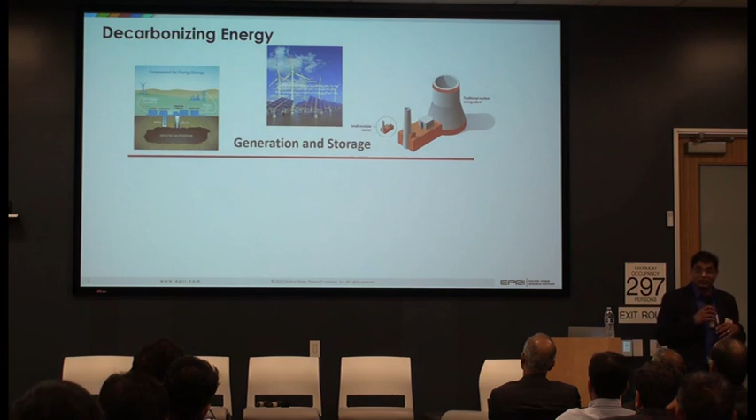So there's generation, energy generation and storage. And when we think of energy generation and storage, yes, everybody knows renewables, there's lots of renewables going on. We have seen that market transform in the last 10 years. The cost of renewables have come down, it's happening everywhere. There is some research going on things like modular nuclear reactors, it's again low carbon energy generation. And then we have to think about storage, as we think about how we are going to get to this 80%, 90% renewable goals.

Storage becomes very important, and we have Shankar Ramurthy who's working on energy harbors. Really, really interesting company, looking at storage that's not just 1 or 2 hours for your batteries for cars or things like that, but seasonal storage. The wind doesn't blow all the time, the sun doesn't shine all the time. You could have 10 days when there's no renewable generation. How are we going to balance the grid? Shankar is going to talk about that.

Then we talk about how do we get carbon out of the usage of energy. And when we think about it, yes, EVs used to be exciting and interesting, but electric transportation has to go beyond EVs. So how many of you have heard the word, and I might not say this correctly, flygskam?

Okay, so that's the new word. I think it's called the word of the year now, because it's called flight shame. Flygskam is flight shame in Swedish. It's about the fact that the carbon intensity of airplane flights is pretty soon going to be the highest intensity, highest carbon emitter, if we start doing what we're doing right now in buildings and the generation grid, that's going to be the biggest carbon emitter. And so Satya is going to talk about how we are going to address that with electric aviation.

So again, these are all pieces to the puzzle. Then we have to look at how we are going to decarbonize our homes and buildings and look at the technologies that can do that. Venkat is the CTO of Bloom Energy, the pioneers of fuel cell technology. He's going to be talking about what they're doing moving forward, not just for buildings, but at the generation level. There's all these issues around how to use gas, how do you do carbon sequestration. So Venkat is going to talk about the big picture with fuel cell technology.

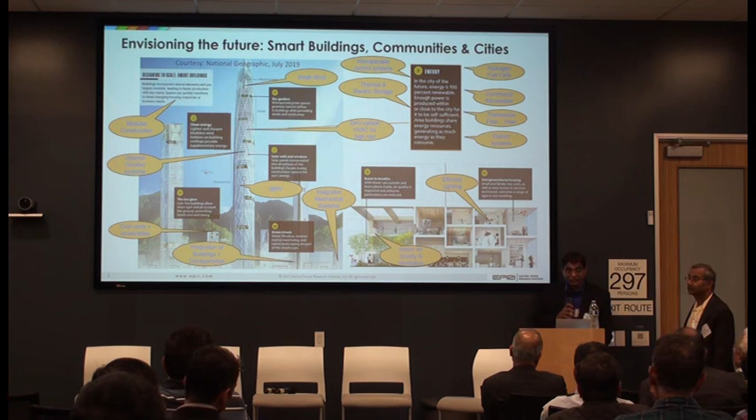Good morning or good afternoon, depending on the time. So, anyway, I'd like to give a brief introduction about Bloom first.

I think the way the company started initially was just power generation. So we never talked about how it fits into clean tech, and it kind of morphed into it over time. Now when the needs are there in terms of not necessarily producing power, you need to produce this in an eco-friendly way, it needs to be reaching everyone in an eco-friendly way. So the play field has changed over time. I've been with Bloom for—I used to be called Ion America—I've been with Bloom for 16 years. I've seen the transformation in the entire industry, where we initially thought, okay, I have to get cheap power, but now we've come quite a bit. So let's start with the vision of Bloom first.

Our mission is to make clean and reliable energy affordable for everyone in the world. That's a mission we started, and it's getting more and more relevant now than when we began. When we started, we thought producing electricity cheaply was enough. Now clean and renewable factors have to be considered. Above all, we have to save the earth, so there's a moral and ethical responsibility we have that goes beyond just producing power.

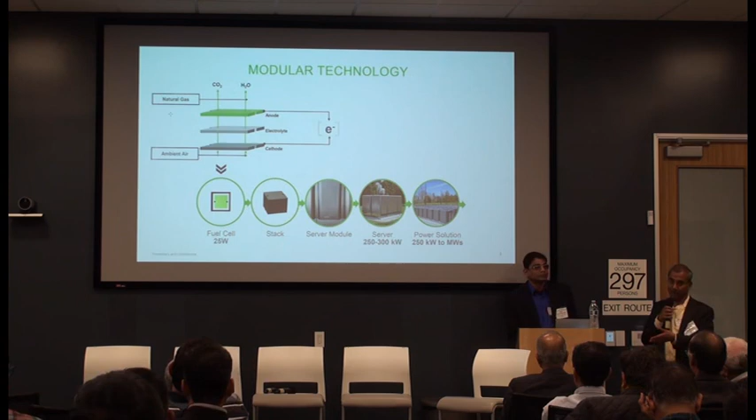In terms of construction, we actually go through steps. We get cells, we stack them, we put them in modules, and then we build the power plant at the end. So we have scalability, and every module is 50 kilowatts, and you can go from 250 kilowatts all the way up. We already have implementation of 30 megawatts, no limitation, you can go all the way up. It also gives you the ability to build as you need. It's not like one day you have to decide and do everything. You can build as you need.

If you look at the next slide, I'll give you some classic examples. We are supporting data centers, and in Korea particularly, where the real estate is limited, we actually did the car park type of structure you see on the right. That's the thing in South Korea, where you can stack it up as much as you want. So it gives you the flexibility going from small installations all the way to large power plants.

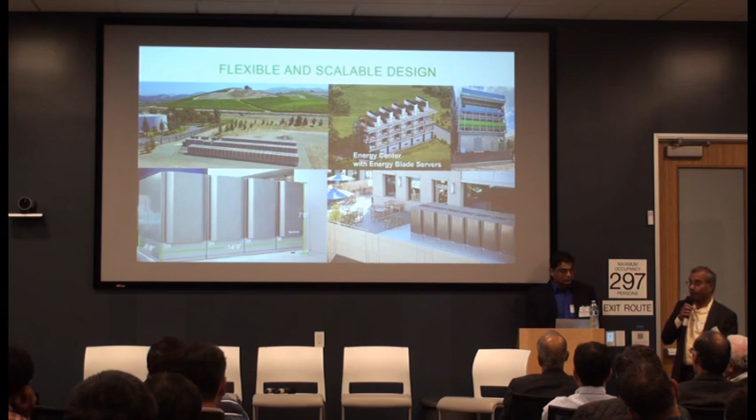So what is the main difference here is, if you think about the traditional way of doing power generation, obviously you produce power, then you have to transmit it, then you have substations, and finally it comes to you. You've got all the wires sticking out, right? There's nothing like that for us. We basically have on-site power generation. Because of the fact that we are 24/7, we have reliable power, and we've got the modularity attached to this, you can practically get away from using UPS and backup generators—all of that can be eliminated completely.

So in essence, if you're looking at reducing CO2 emissions or greenhouse gas emissions, by virtue of just removing the backup generation alone, it's pretty big for places like India.

For instance, if you look at the right-hand side, it's the actual operation curve for the Intel data center that we support. Before we implemented, they used to have outages every day, and every day they had to create backup generation. After that, we became the primary load and pretty much eliminated it. So if you look at the power produced by Bloom, it's constant, and it actually supports the load regardless of whether they exist or not. That's big, and they would still have backup generation. They originally thought they couldn't run it down, but now over the years they've realized they absolutely can eliminate it. So this is good news for India.

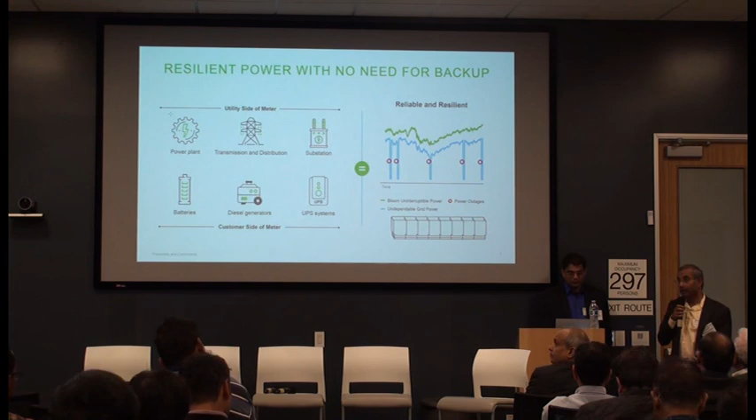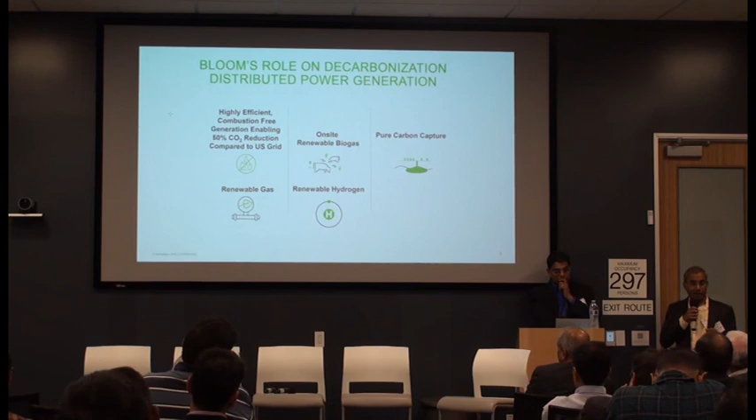So where we are heading is, if you look at the space now, more towards decarbonization—today we can take natural gas as it exists and convert that to electricity, which reduces the amount of emissions. If you take the next step towards it, then what do you do? You can actually take biogas, which we already have programs for. We've proven the technology to operate fine on biogas, landfill gas, whether it's animal or food waste—all of them can be utilized.

Just now we made an announcement: we had worked with Energy Power, who have been involved in producing biogas. We had an announcement just yesterday saying that we partnered with them to take a 4 megawatt installation in Maharashtra, using the biogas and producing power from it.

As we go further, people talk about renewable hydrogen. One of the reasons we haven't focused much on that is not because we cannot run the system, but because of the availability of renewable hydrogen. Now I think there are more technologies coming up, more efficient ways of producing hydrogen, and as they exist we can use the system, primarily because we convert from chemical energy to electrical energy at the highest efficiency, which holds good even in the hydrogen framework.

We can continue to run it wherever the hydrogen is available. It's available as a byproduct of a process, or you have a technology that gives you water dissociation to produce hydrogen. Regardless of what it is, we can use it.

The last piece we are doing is, think about the anode and cathode I showed. Because there is no fuel-air mixing, we have the ability to produce CO2 which is clean. There's no mix at all.

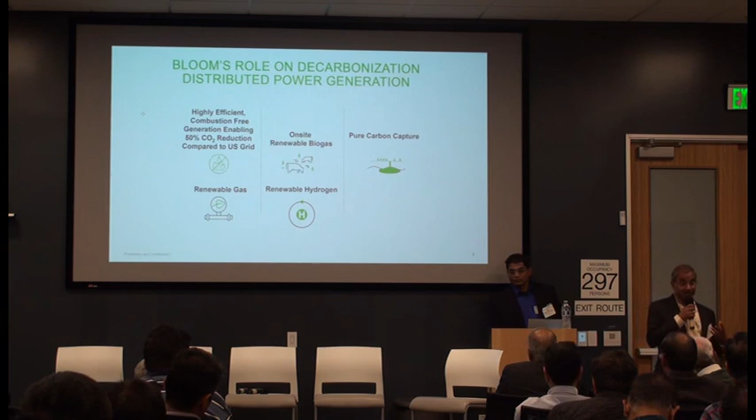For us, it's actually a given, because we do produce CO2 which is clean, with no mix with air. So now we can suck it up and give it to any downstream process.

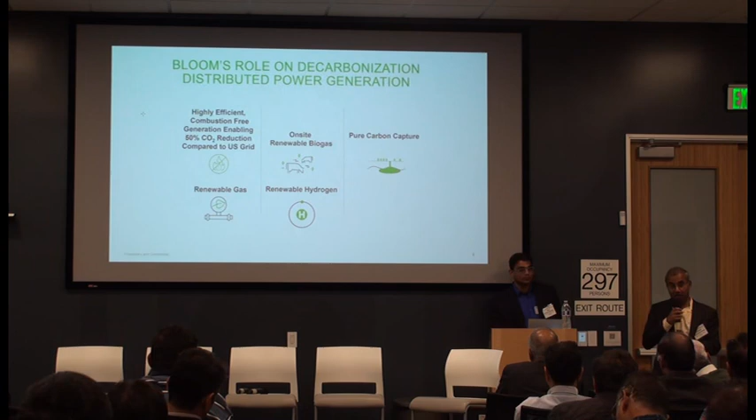Again, this has not been delivered as a product in the past, primarily because of the technology for capturing the CO2, there's a captured part and a sequestration part. There's been a lot of debate on how you do it. Now, slowly in the US, they have studied different ways of doing it. Even storing the CO2 underground, they've done a large geological study to figure out where you would be sequestering. So that is going in full speed.

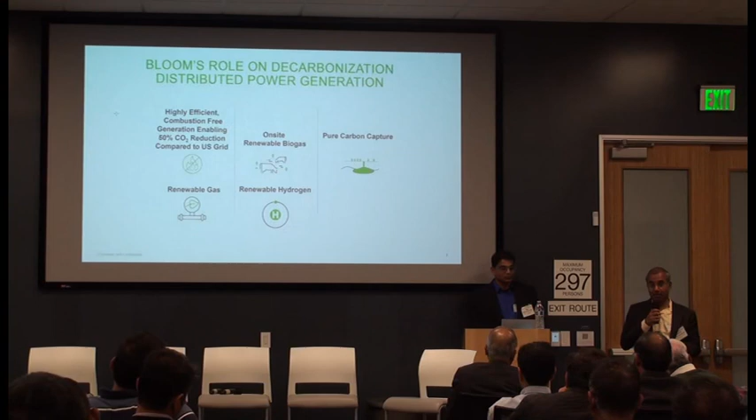So now if you fit right into that, you take the CO2. The last 3 days I've been working with Southern, a utility on the East Coast. They are interested in taking the CO2 and putting it in the ground. I actually visited the site where they do it. So we're pretty simple about it.

Now that we're doing this end to end, think about it this way: you've got your natural gas with high efficiency, reducing greenhouse gas emissions compared to conventional. The next level is you can use biogas and become carbon neutral. Now extend it further, you have a way of taking the CO2 out and putting it in the ground. You actually create a negative emission. That's the way we are approaching the decarbonization problem.

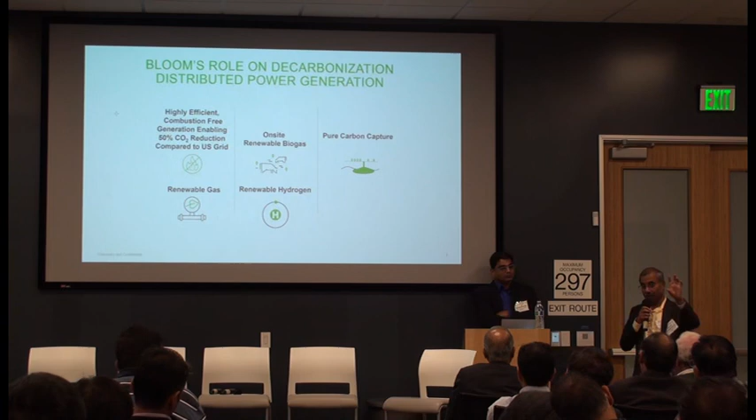The other part is, since we are set up in a way that doesn't generally require a separate power generation setup, we can integrate with any technology. For instance, we have applications where we integrated solar. Take the Apple Campus 2 case study - we actually coexist fuel cell as the primary source along with solar.

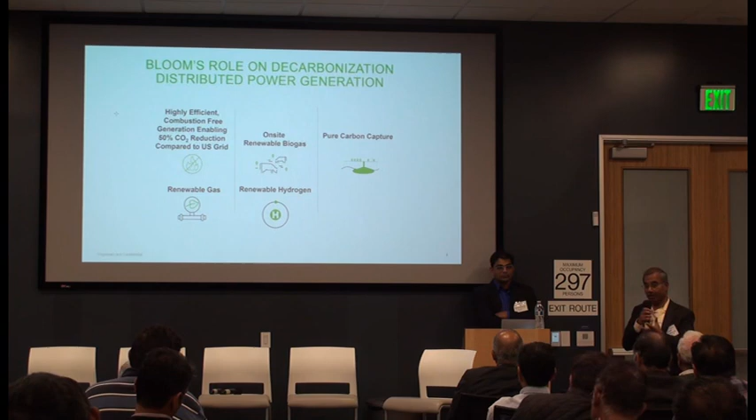We can take any storage technology - we have applications where we're doing storage as well. In other words, you can create a microgrid environment where we become the primary source. The biggest challenge in a microgrid as it exists is you need steady power, otherwise your supply and demand won't match, so we are right there.

So, what's our overall strategy? First and foremost, distributed power generation - that alone avoids all the transmission losses. We've got the paradigm shift from natural gas to biogas to hydrogen. We can fit into this framework.

Furthermore, people ask, hey, you're at 65% efficiency, what do you do with the rest? The rest of the heat. We never bothered about it because heat integration is a pretty tough thing to do. Now, the fact of the matter is, when you go to the tower - the thing you saw in South Korea - they all come into a common plenum, and we can recover that piece of heat too. So we've done work making it a combined power generation with heat recovery as well.

We can produce pure CO2, greater than 99.5% purity. We have the ability to go into negative emissions. And furthermore, there is an interesting paradigm shift.

People have been working on lithium-ion batteries and battery technology for storage. But if you look at an article written by a professor at Irvine, Jack Brouwer, he says think of it this way: if you have excess energy in some cases, you have two options - store it in lithium-ion batteries, or use it to produce hydrogen and transport it, which becomes a way of shifting energy from one place to another. And we are right there. He claims the round-trip efficiency is pretty high.

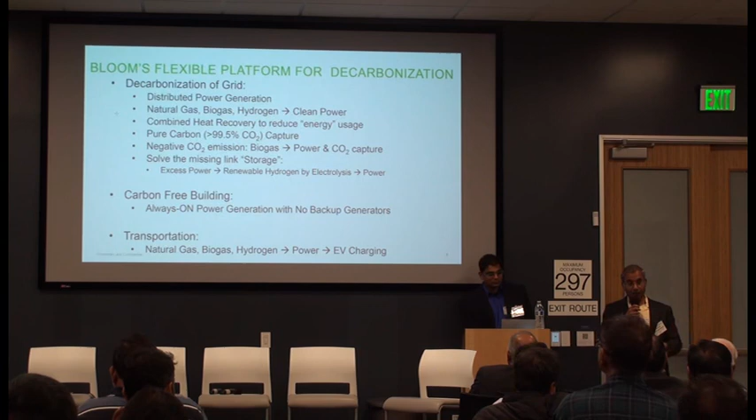So we already kicked off a program. We're going to be working with a company that manages a digester. They are taking animal waste in the Fresno and Bakersfield area, and they will be tying with us. We'll use their biogas to produce electricity, which will be used for vehicle charging. So we've thought through the whole thing about decarbonization in a big way.

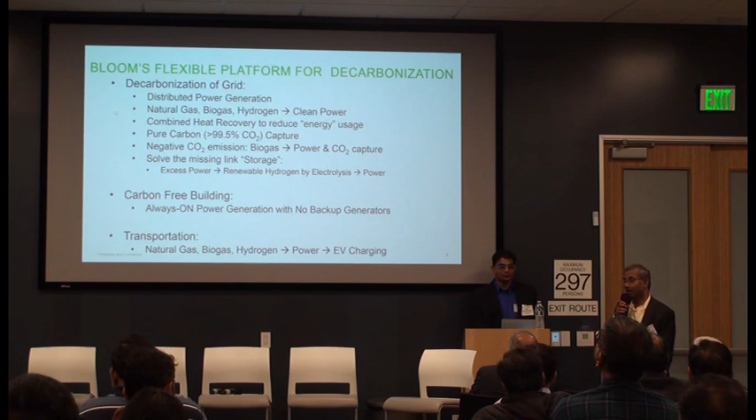I think we are right in the center of it. We have all the tools to be manipulated depending on the demand. So if you go to the last few slides, I just want to give a few use cases.

This is the one in Utah - an eBay data center. Originally they wanted to design a tier 4 data center with UPS and all the generators. They had a plan to do that. Then they actually did an independent study - they hired a third party to review our technology and found out we are actually better than the tier 4 data center in terms of reliability. So finally they decided to go with Bloom.

So we became the primary power and the grid is the backup. The good news is there are instances where the entire state of Utah lost power - we were the only one powering the data center. There you have to look at the value proposition: every millisecond translates into millions and billions of dollars. So we've been operating for the last 5 years.

It's old technology. The other one is Apple, you all know. If you have time, you can go and visit them. We became the primary source. This is the one I was saying.

It's like a microgrid - we coexist with battery storage, and also with solar. The controller, the way it works out, is we can actually flex it. This is very important in a microgrid. People have been talking about microgrid, but if you don't have a stable, round-the-clock base load generator, it becomes extremely complex, because when you produce power, delivering it becomes difficult.

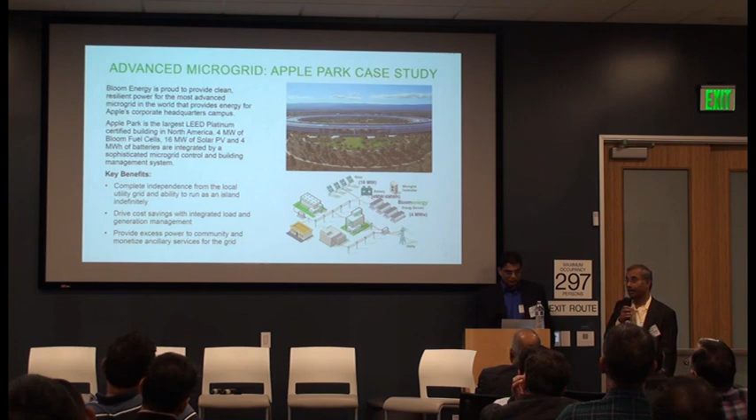And then the last bit is Intel. The story I told you is they also had demand issues. They had two problems: one, they had to run the generators every day, and they had power outages. Second, for them to expand, they had to go to BESCOM and build a substation.

So they came to us. We became the primary source - it's been running since 2016. We became the primary power. We parallel not only with the grid, but also with the generators in this case. So when the grid is off, we can parallel the generator too.

Initially, they were a little worried about Bloom, so they actually kept running the generators alongside. Over time, they got the confidence, and they practically brought down the load taken out of the generator. This is actually running at one-tenth of the load it can support, so now they're planning on removing the generator entirely. So this is another case study.

So to conclude, I think from Bloom's perspective, we've gone through the entire ecosystem where we fit in. I think we are in a pretty good place, particularly as we believe in the different technologies we're going to be talking about today. We have a way of integrating with all of them to create the microgrid solution. The thing I didn't talk about is that on the right-hand side, from a fuel perspective, we have flexibility starting with natural gas, going to biogas, and also using hydrogen - we can also capture the CO2 coming out.

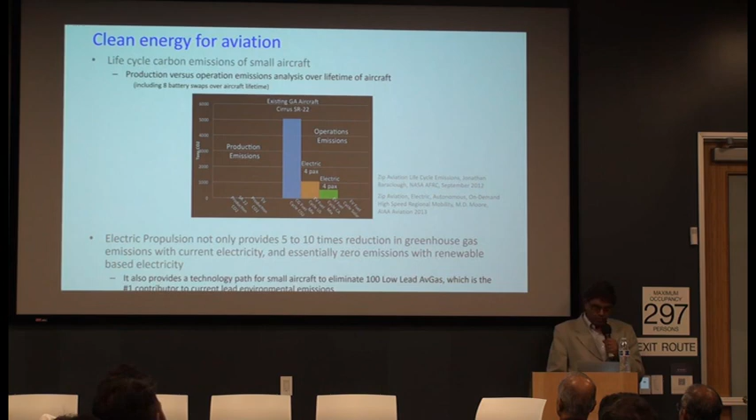So what is exactly the problem? The problem essentially is the energy penalty. This energy penalty is a much more severe penalty in aviation when compared to automobiles.

Here's this graph comparing the Cirrus SR-22, a four-seater aircraft, and its corresponding electric aviation counterpart. The point is, if I have to have the same range for the aircraft, I need to put in so much battery, because the battery doesn't really have the kind of energy densities needed today. If I'm looking at a battery density of about 200 watt-hours per kilogram, you're looking at an aircraft weight of about 11,300 pounds, which may not even be possible for the aircraft to take off in order to give the reach that it wants.

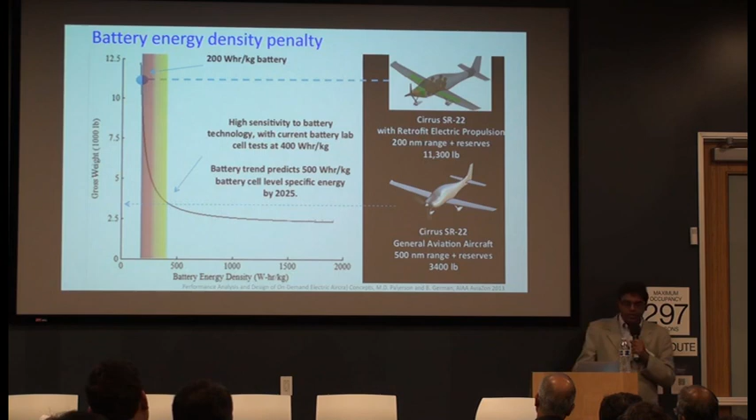There's been general skepticism about this in the last several years, where people say there's this huge hyperbolic curve, and you need to get to a floor of at least about 400 watt-hours per kg, and that's not happening yet - but we expect it can happen by 2025. I have a completely different take about this, and that will unravel pretty soon. But the point people have been saying is we're waiting for this messiah of a big energy density jump.

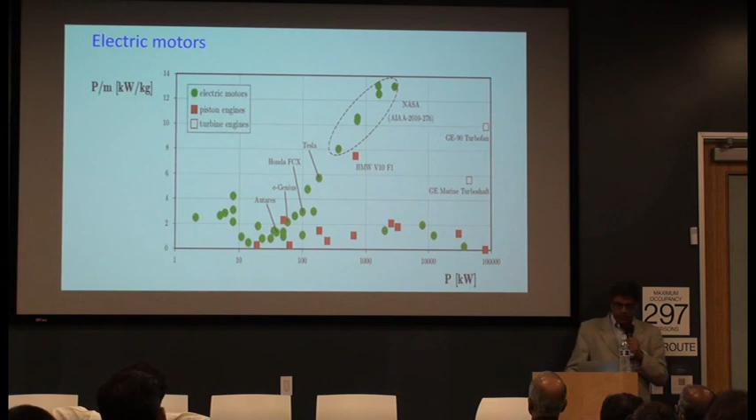Now, it's not about the batteries alone. This gives you an overview of all the different components - we need to worry about the motors, and NASA has done a marvelous job in the mid-range of power, at about the 1,000 kilowatt level, developing motors with a very high power-to-mass ratio. The first thing we have to worry about in aviation is having very good energy density for the batteries, upwards of 400 watt-hours per kg as we talked about. But we also have to have these motors be pretty light. So lightweighting is very important, and there are significant developments focused on electric motors from a lightweighting perspective for this purpose.

Closer to home, where I belong in aerospace, there's some kind of aerotech also being developed by NASA, which is called distributed electric propulsion.

So we take advantage of the fact that electric propulsion is scale-free, which means we can distribute a lot of small propellers along the wing with small motors. You don't have to have mechanical transmission from a big engine in the middle to the different propellers; instead we can simply run wires, which is a lot easier.

What this basically does is change the aerodynamics of the flow past the wing and enhance the lift produced. Now, if you have enhanced lift, why do you need it? Because the weight of the aircraft stays the same, so you only want the lift you need, which allows us to shrink the wing size.

You don't necessarily shrink the wingspan, but you shrink what's called the wing chord, the width of the wing, which allows for less drag. And with lesser drag, improving lift and decreasing drag, or the L over D ratio, can actually extend the range further from an aerodynamic point of view.

Since the wing becomes sleeker, we can have much better ride quality and gust sensitivity, because we don't have large wing surfaces that a gust could shake. This matters because in urban air mobility we're looking at aircraft flying at much lower altitudes than conventional general aviation, where gust becomes important. General aviation aircraft typically fly near the tropopause, past the clouds, where there isn't much gust. But with urban air mobility, where you'll be picked up from your home, you're looking at an altitude that is gust prone, and this becomes very important.

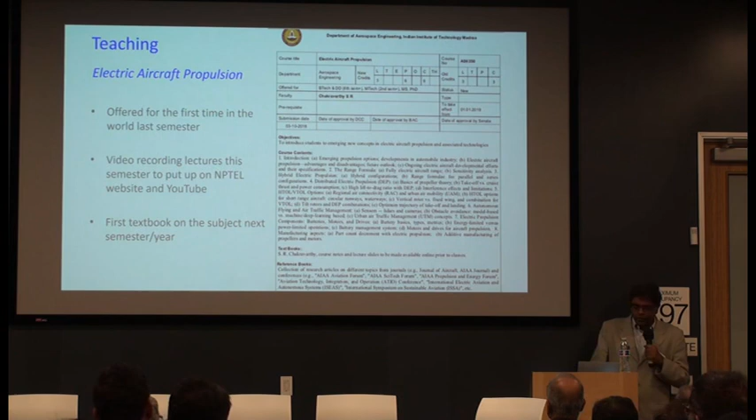A full semester course on electric aircraft propulsion. I did this last semester and I'm continuing it a second time, making a video recording of it and putting together a textbook on this, so that I plant a flag for myself in this space. That's exactly what we're supposed to do.

Last year and this year I've been presenting papers at the AIAA Aviation Forum on similar topics, like a range equation for series hybrid aircraft where some combustion support is also provided, and another on deep learning for autonomous traffic control systems.

These are a couple of things we've done. Very recently, I've begun looking at metal-air batteries, which Professor Getu's videos covered with someone from Ashok Leyland. I'm part of a small team exploring whether we can use metal-air batteries the way air-breathing engines have been used - if I go faster, can I improve the performance of these batteries in air?

On technology development and entrepreneurship, we have an IIT Madras incubated company called the E-Plane Company, which right now is doing something very small - a tabletop VTOL and fixed wing hybrid, similar to Lilium, meant for cargo transport, typically food deliveries and medicine deliveries.

But we have plans to scale it up into something bigger that can carry tens of kilograms of payload over long distances. It looks like a VTOL, can take off and land anywhere, hover and avoid obstacles midway using deep learning and computer vision, and fly over long distances, about 100 to 200 kilometers on a single charge carrying payload.

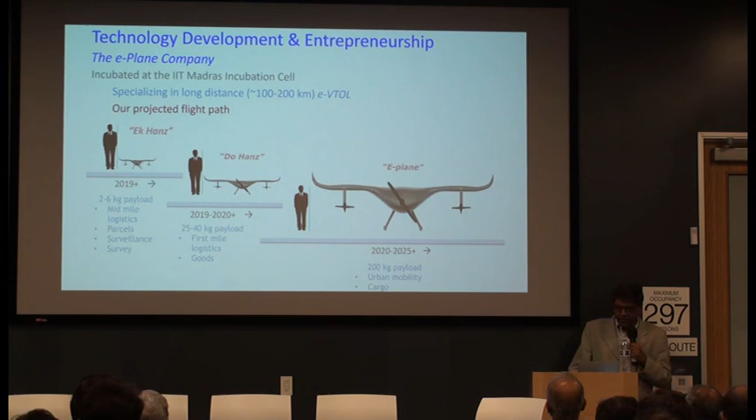The long-term vision over the next 5 years is to step it up to about a 200 kg payload class, by which time we think we can have 2 passengers go on an autonomous flight.

In the core technology, on the left-hand side we have computer vision and artificial intelligence. On the right-hand side, we're trying to marry the VTOL and fixed wing in a particular way that complements NASA's tech in the vertical sense for changing the airflow field around the airfoil to produce lift, so we can marry the two concepts together much better. We have some IP generated out of that.

We are an energy technology company, and we enable renewable energy use more widely. I use the term energy technology company because it's our energy technology that enables us to achieve a real renewable revolution. In order for us to be a pure renewable economy, we need very large scale storage. What's the problem?

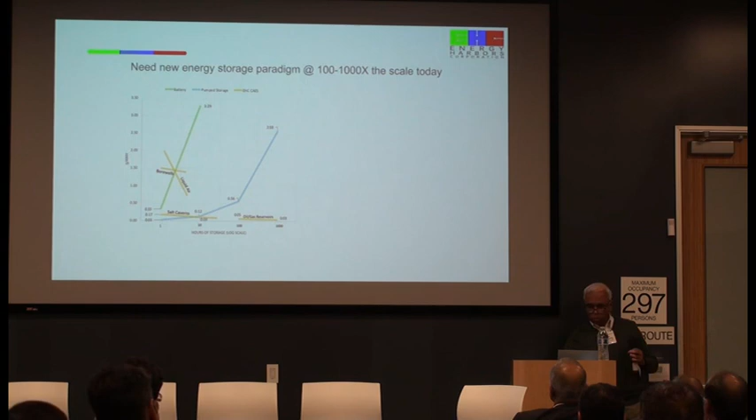Is that good? I can scroll it for you. Thank you. So why do we need very large scale energy storage? Sorry, it's supposed to scroll one at a time. But what do we have available today?

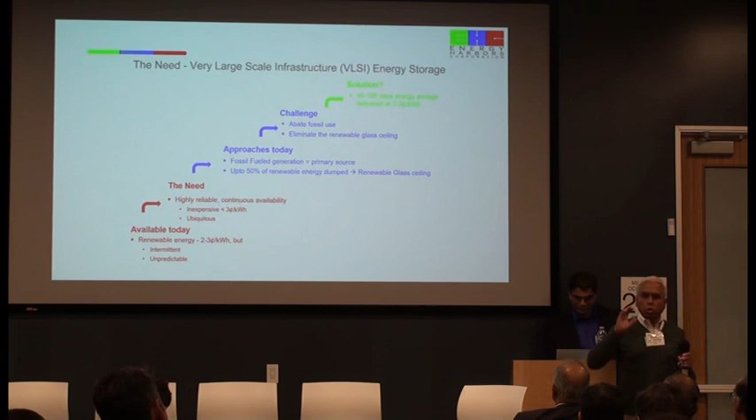So the only way we are able to achieve anywhere near this today is by having a base fossil fuel power grid. And if you try to push up your renewable power generation, without large scale storage, you're going to end up dumping most of the power, as is already beginning to happen. So you hit a renewable ceiling, beyond which you cannot push your renewable power generation, and the only way you can use renewable is by depending upon fossil fuels to take care of the base power load and basic power distribution.

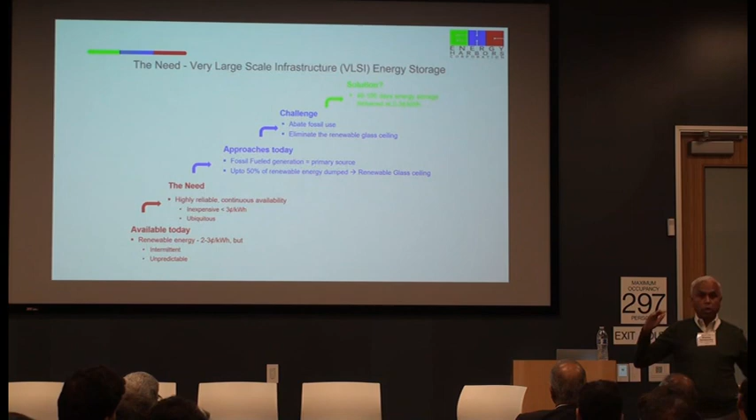So the challenge is, how do we escape and get into this pure, low cost, highly available renewable energy, and abate fossil fuel use and eliminate the ceiling? The solution has to be very large scale energy storage.

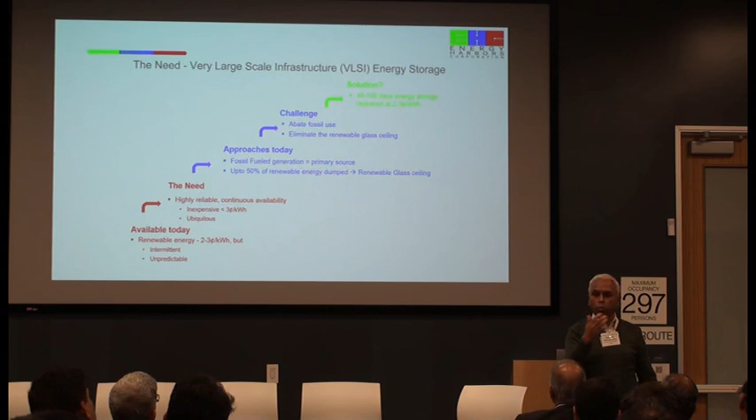By which I mean not the 2 hour, 4 hour, 6 hour, 100 hour storage, not the megawatt scale, 10 megawatt scale - I mean terawatt hour scale, tens of terawatt hours. Gigawatt power generation, and we are fuel agnostic - whether it is renewable electric or renewable gas.

Gigawatt scale, and the solution - I'll read what it is. It is 40 to 100 days of storage at a cost basis of 3 cents per kilowatt hour delivered. That's what we need, and that's what I'm defining as very large scale.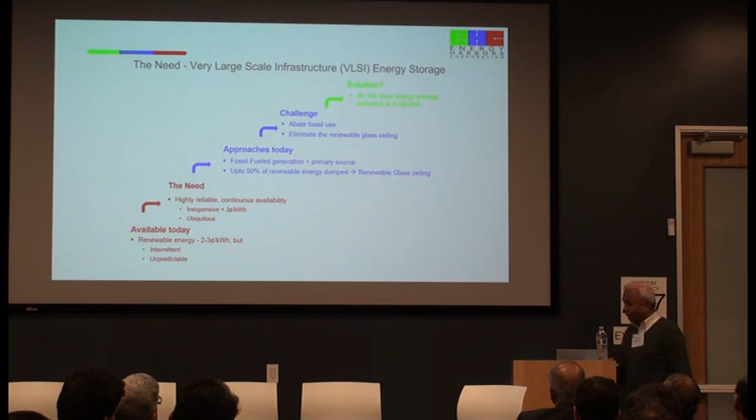I did a play on VLSI - I think it is very large scale infrastructure. It is also very large scale integration, because the way we can make this happen is with a technology that can assemble a large number of components and devices and manage them in real time. So it is in fact a VLSI technology with mechanical components.

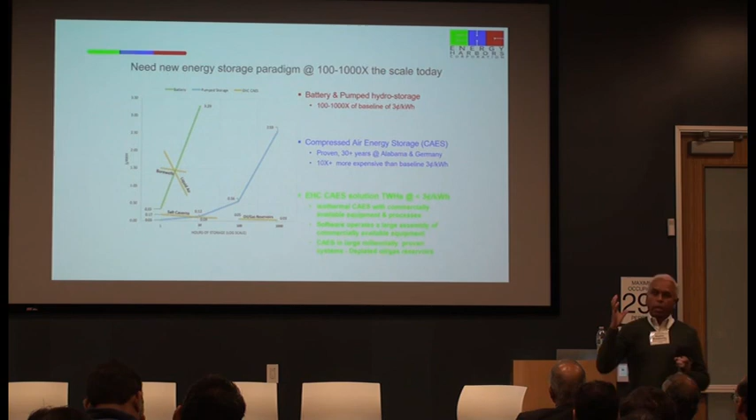And then there's another alternative - we are talking about compressed air energy storage. So it's basically taking what we have as a practically infinite resource, and compressing it at very high pressure, 100 to 400 or 500 atmosphere pressure, converting this surplus electrical energy into mechanical energy. We store this as isothermal compressed air - it's almost like using a mechanical spring. I'm taking surplus energy, taking a spring, compressing it 200 times, and when I need it, I just release it.

So it's like an isothermal compressed spring. Here the spring is air. I'm compressing it 200, 300, whatever times.

I'm reading out the green stuff here again. I'm sorry, I didn't realize that. We will lose the visibility here on green.

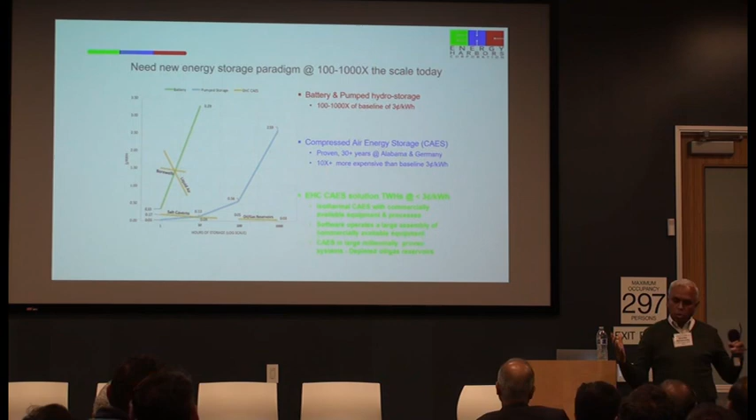So what we are really doing here is to compress air in very large reservoirs, and when you have surplus energy, store it in these defunct, depleted oil and gas reservoirs. They are large, as you know. The minimum size of an oil and gas reservoir, there are many oil and gas specialists here so you will know, it's about 40 million meter cube.

So at 200 bar, you are storing about 25 kilowatt hour per meter cube. Quick math, 40 million meter cube is 1,000 gigawatt hour, which is 1 gigawatt for 1,000 hours.

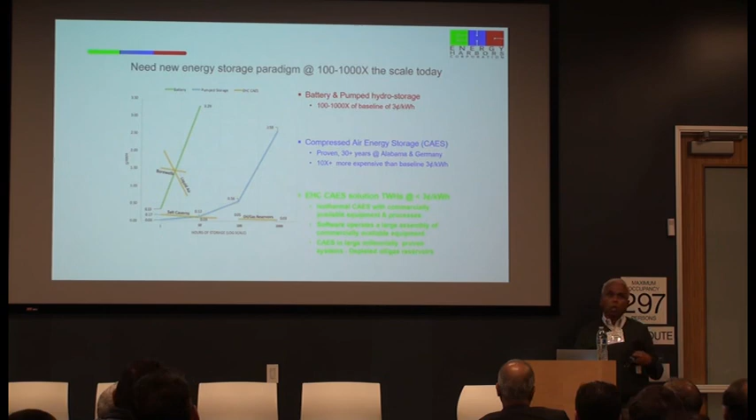So that's the large scale energy storage problem. Now the question is, how do we do it?

Many of you may have heard of compressed air energy storage, more in the context of many failed compressed air energy storage initiatives. There have been operating compressed air storage companies at scale. These are adiabatic compressed air energy storage systems that have been operating in Alabama, in Germany, for more than 30, 40 years, functioning perfectly. In fact, even now, I could mention Southern Company operating one of them. But they have never gone beyond the research stage because that technology was prohibitively expensive.

And it was definitely not scalable. They operated 300 megawatt plants for about 10 hours, but its cost is at least 10 times, if not 20 times higher than our base cost of what we need, 3 cents per kilowatt hour.

So the basic approach to doing isothermal compression is by using proven processes. Three technology companies that tried to do compressed air energy storage in the last 10 years ended up developing new processes and new equipment to solve the cost problem. And the number of cycles they took to develop the new process and stabilize it, or the cost it took to reach with new equipment, was still nowhere near what they needed to be, and they ran out of venture capital money before they could perfect the cycles.

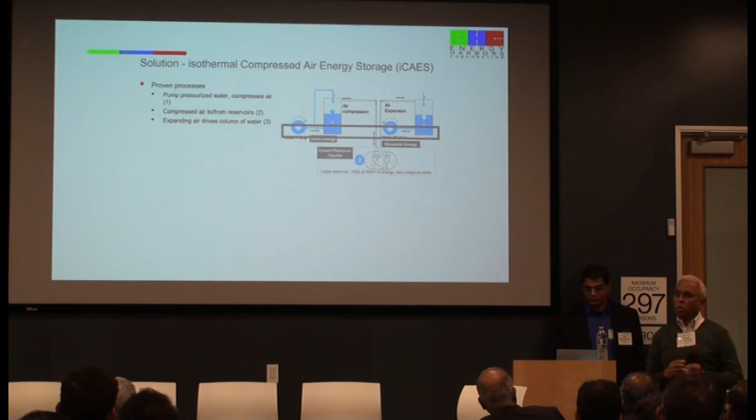And then you see that when we are trying to generate energy, we're taking the compressed air, driving the same water piston in the pressure vessel down, and that water piston is basically running the turbines. So this will be pumps acting as turbines. Okay, so that's the basic idea.

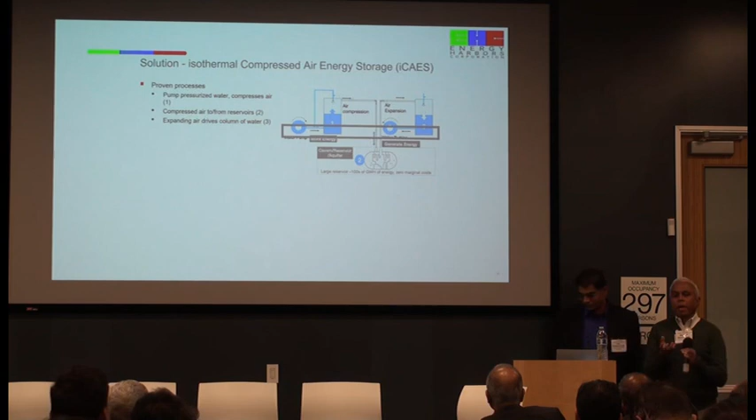We obviously have batteries in the front to take care of transients, so that we can deliver continuous, intelligently predicted, constant availability power. It is the use of off-the-shelf components, use of a large-scale assembly of these systems that helps us bring the capital cost down by a factor of 5 or more. That makes it possible for us to achieve the 2 to 3 cents per kilowatt hour.

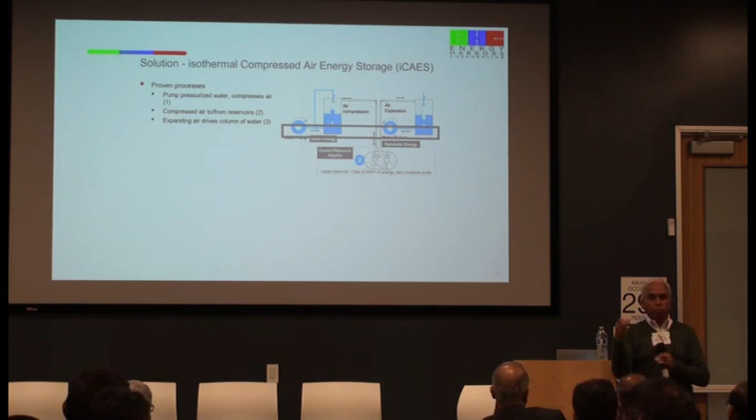This is also very modular, so you can basically install modules for 64 megawatt, which is our standard module size, itself composed of sub-modules. And the 64 megawatt is based upon the airflow that you can tolerate without significant loss with an existing oil and gas well pipeline that goes into a reservoir.

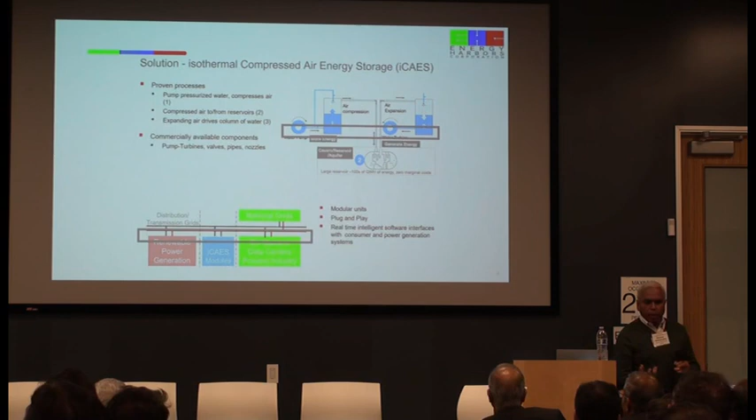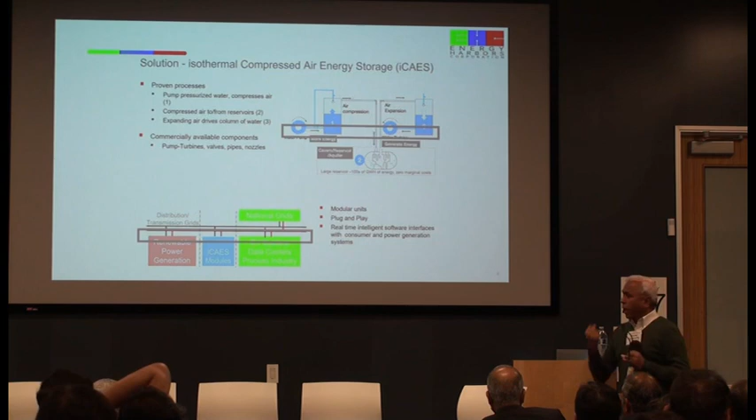This is modular again, so it's architecture agnostic, meaning it can tolerate distributed or centralized forms of renewable storage, or any other form of storage. You would have as many iCAES modules as oil wells you can install at that location. On the other side, in green, you could have microgrids, local grids at 11 to 110 kilovolts, distribution grids, or transmission grids, or a number of them. So it's grid agnostic, fuel agnostic, and architecture agnostic. These are modules that we can insert.

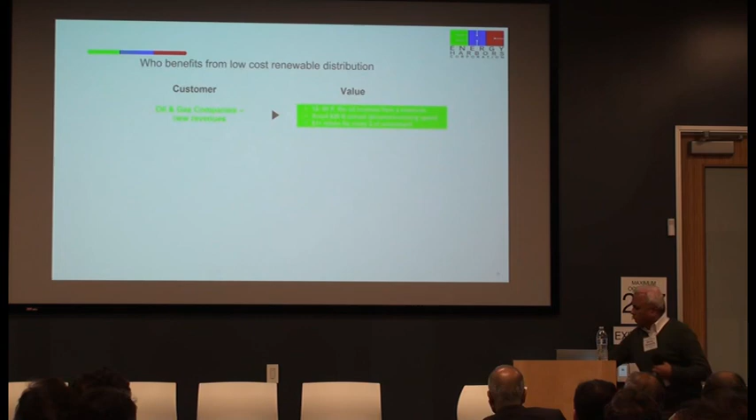Who benefits from this? These are our early adopters—the oil and gas companies themselves are our first customers. We are just beginning to work with some of them. We have a prototype in our lab, we've got an engineering design done, and we're getting ready for pilot-level demonstration plants.

The value proposition for an oil and gas company is that for every $1 they generate from crude oil per reservoir, they can have 50 times the revenue. This is the first mover advantage for oil companies who adopt this. Ironically, they would use their oil assets to transform into a clean energy company.

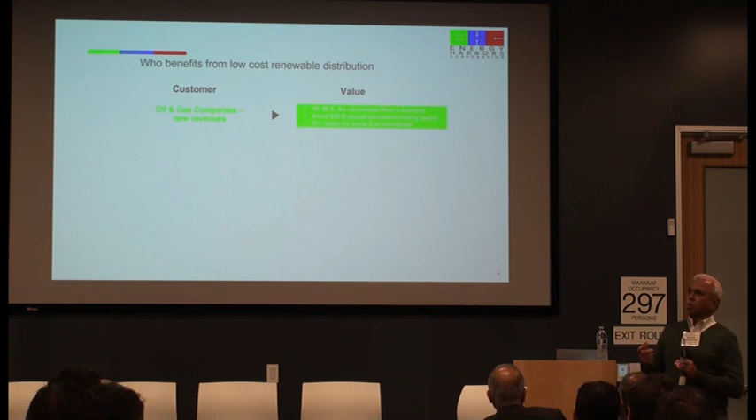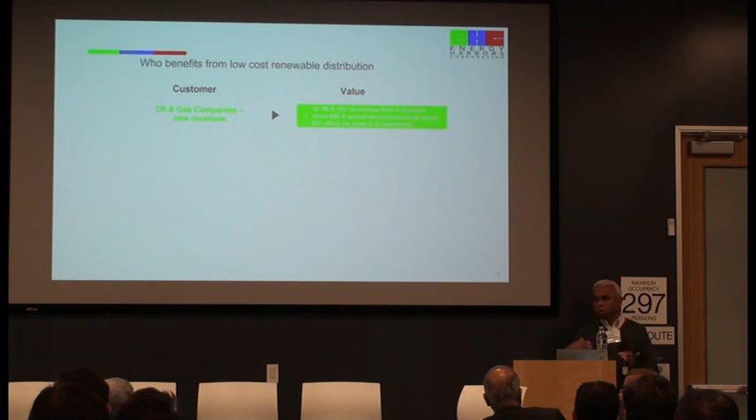It also has a few other interesting metrics. $20 billion is spent by the oil industry every year decommissioning existing assets. You can basically repurpose that $20 billion towards renewable energy storage, and it produces a metric of a dollar return for every dollar invested.

The benefit for an energy generator and distributor is that it increases your return simply because it lowers cost and avoids having to build capacity to serve peaking plants, allowing greater availability to consumers.

And for energy consumers and engineering companies, it obviously provides a modular, scalable, more available, lower cost system. One of the things we're also doing, because of this technology, is producing different functions in different configurations—energy storage is one of those configurations.

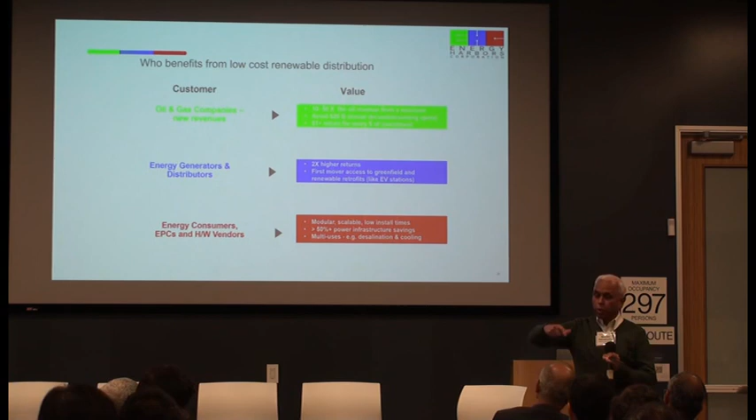50% of the time, your capacity is not utilized, so we use the same pressurized water and pressure vessel infrastructure to produce desalination at half the cost. Because you have pressurized water at 60 to 90 atmospheres, you already have these pressure vessels. You use existing desalination plants with the same available technology—we don't change any technology, we use what we have. The pressurized water in the desalination plants runs through RO membranes to produce pure water, and 70% of the pressurized energy is recycled to produce more compressed air and more pressurized water in that cycle. That's how energy recycling enables low-cost desalination.

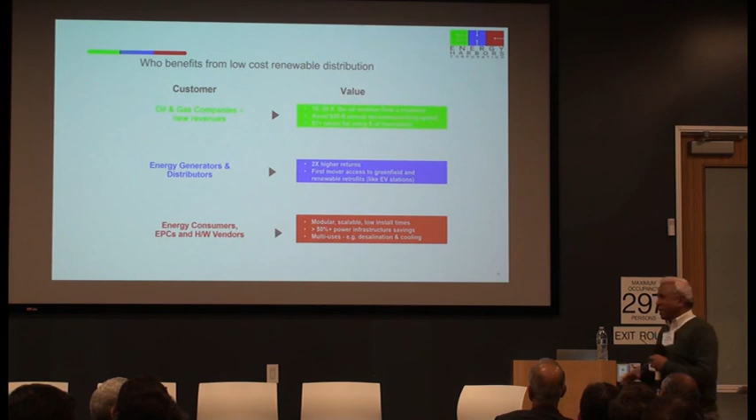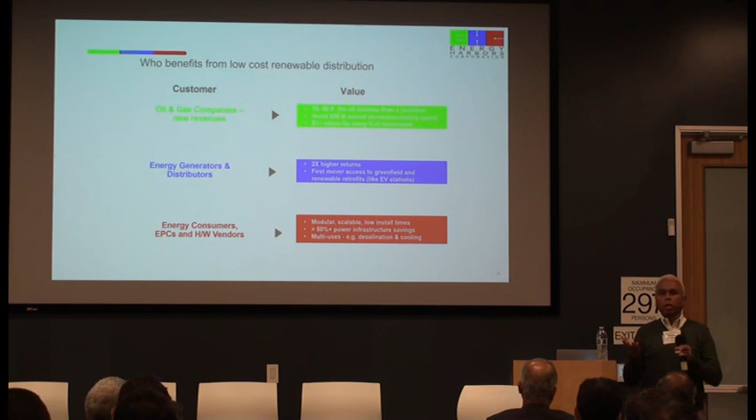For peninsular India, it's a very important solution—low-cost energy and low-cost water. Other things like cooling can also be done with the same system infrastructure. So this is basically an energy technology platform of tomorrow, based on renewable energy, that can produce multiple functions as needed, with software. Thank you.

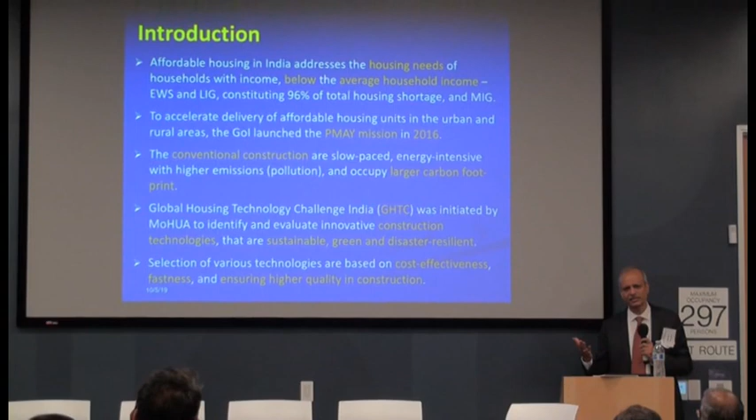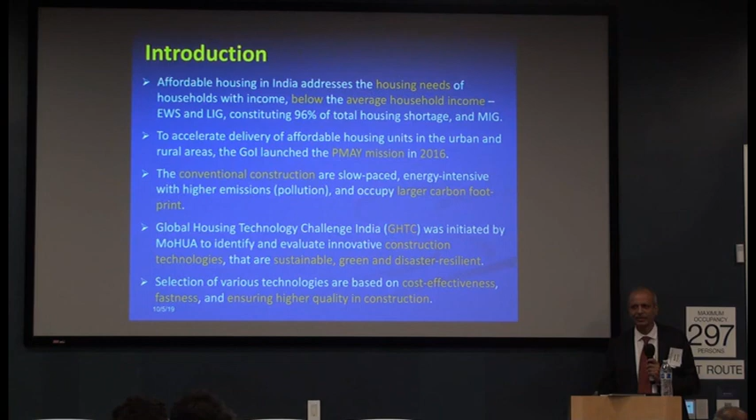There is a mission by the government of India that by 2022 we should have housing for all, and a very large amount of housing stock is required to be built. We have to evaluate what technologies can be deployed to quickly bring it into the market. Last December there was a global housing technology challenge where people around the world were asked for any technology, whether construction technology, materials, or even management, whatever contributes to that is acceptable. There's a big push for things there.

One thing we should recognize is India is also urbanizing, so the solutions we require are urban as well as semi-urban as well as rural, all three we have to have. Not all solutions will work for all circumstances, so you have to pick and choose the right ones.

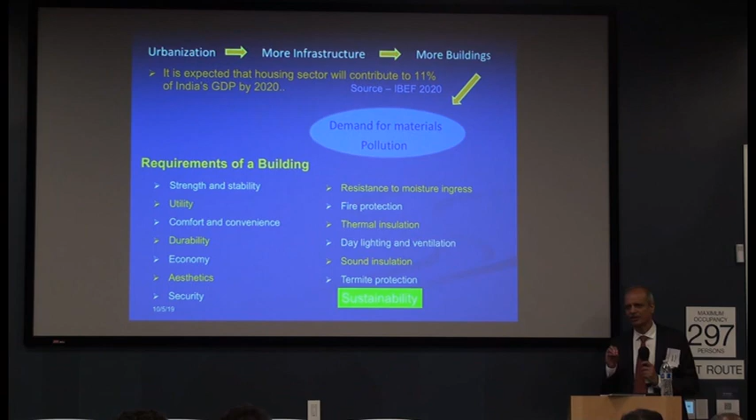At the same time, you want the solutions to be sustainable. That means, as a building, you have to be disaster resistant and have all the other features needed. But what is important here is, how do we provide 20 million houses in the next 3-4 years with our labor shortage and the capital we have and everything else? So it's an issue that takes a larger perspective.

We have shanty towns and we have multi-story buildings. One of the replacements being considered in Bombay is to take the shanty towns and convert them into high-rise buildings for the poor, releasing the land for others to develop, coexisting with other things. It has been successfully done in 2-3 projects using precast construction. I'll show you the pictures a little later.

When constructing such a large amount in a shorter time, if you use technologies with materials that take lesser embodied energy, even in the construction phase itself, you would save a lot of energy. There was an organization called IFC, part of the World Bank, that found for an Indian context you can save up to 20% by choosing appropriate technology that already exists and works in the country. So there are solutions available and we have to make them applicable.

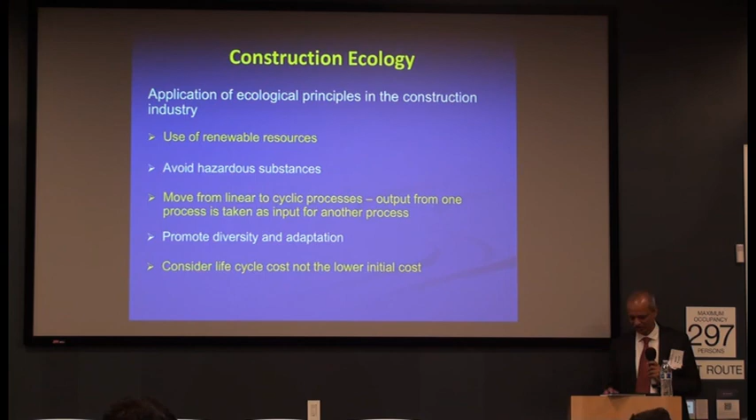If you look at it broadly, to improve construction efficiencies, there are solutions based on formwork technologies, and there are also solutions based on materials and new material science.

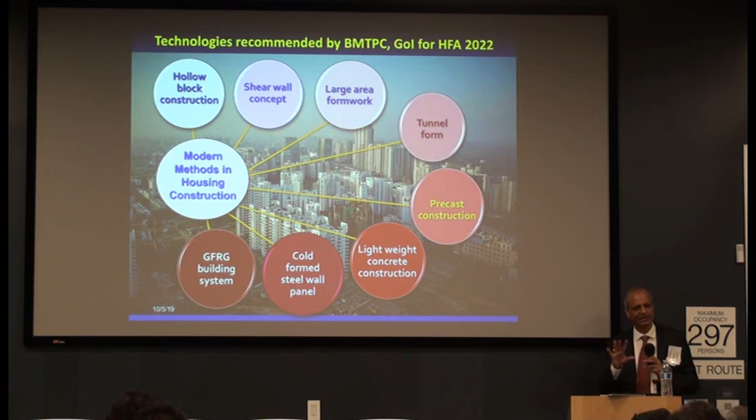As part of this, one of the things we really worked on is the GFRG technology. I'll spend a little more time on that, and I'll quickly show the things that have happened in the Indian market over time. Let me show one example here.

Formwork systems like aluminum formwork and nylon S-form are being used, but they are meant for very urban things—you should have a very large number of housing clusters, let's say not less than 5,000 to 10,000 units, only then can they be more economical. There are problems, and you can also look at tunnel form, another type of formwork system. The other thing really being applied right now is precast concrete technology. There's one building where we helped—it's a 24-story building for affordable housing, fully precast.

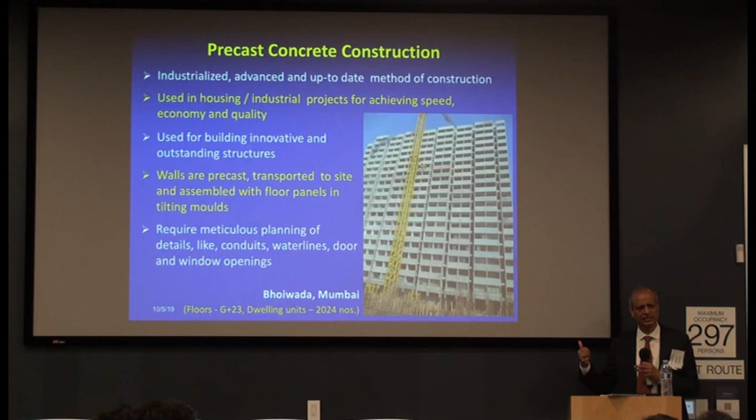And then you also have a lightweight concrete construction. You also have the cold form steel housing systems meant for up to 3-4 stories. You can manage that one, and a colleague of mine works on that.

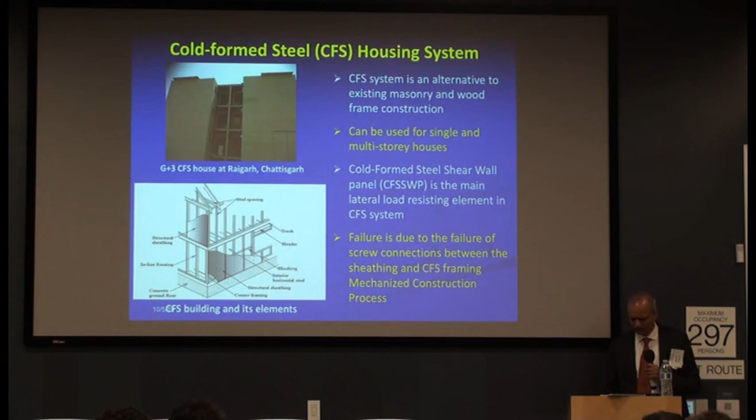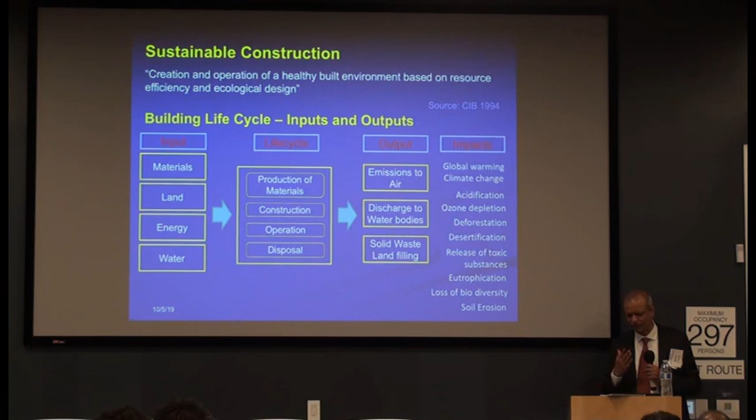So there are possibilities. Then you also want to apply some sustainability concepts in developing the housing. So then you have to look at the whole life cycle, what is happening, what are the things we need to do, and take care of them.

So I'll just quickly go through one of the indicators that we have to look at, in terms of embodied energy or carbon footprint. What are the things we have to look at? One is in the phase of construction, the other is in the phase of operations. Most people working in operations, I will not touch on that. I will just look at the construction phase and choice of materials, what we could do there.

So there are multiple ways this is being approached. One is to upgrade our codes, where you insist on a regulatory framework - you have to do this one, there's no choice. So these concepts are brought into our National Building Code.

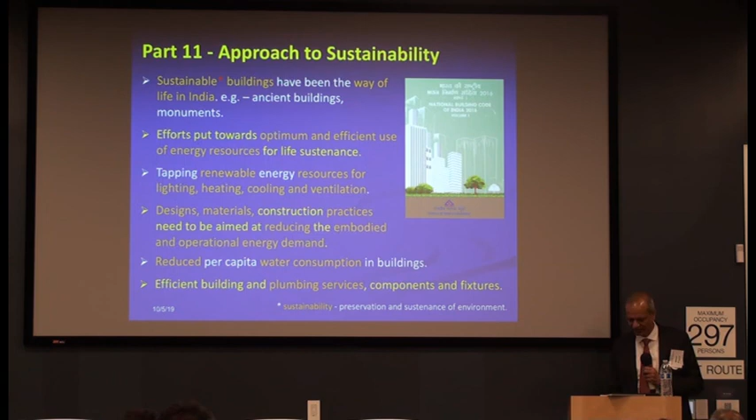But at this point of time, it was introduced in 2016 and it is still recommendatory, not mandatory as yet. But I think in the next cycle, after 3-4 years, it's definitely going to be mandatory in terms of energy use, choice of design, and the approval process. There is going to be a lot of insistence on following sustainability design concepts and principles.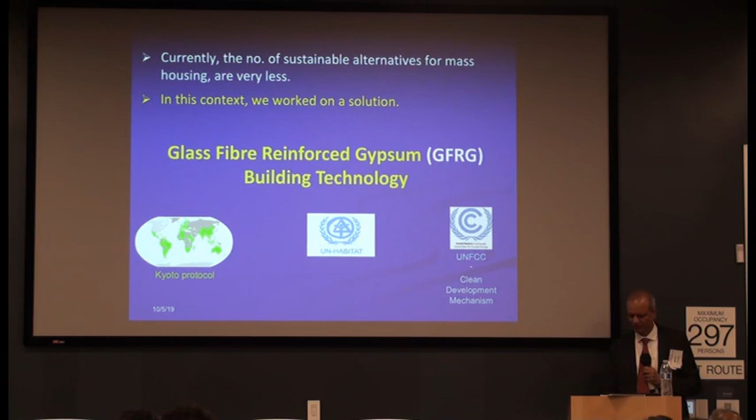I would just quickly go through one of the technologies we worked on - glass fiber reinforced gypsum building technology, panels based on. These are panels made from waste gypsum, a fertilizer waste that is available in plenty in the country.

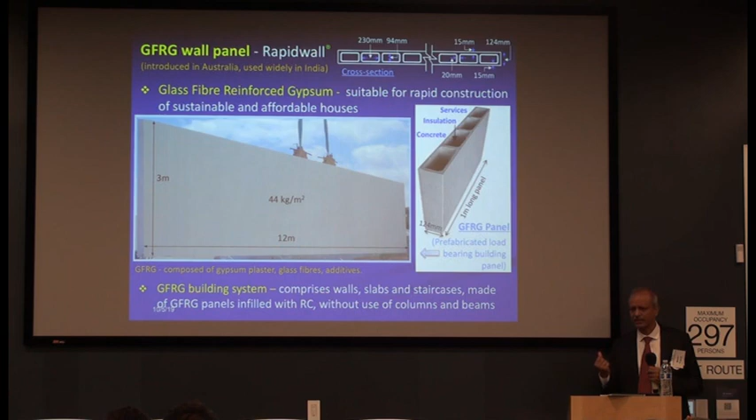You impregnate it with glass fibers to get the required strength. So what I want to say is, right now there is one factory available in Kochi, where that place alone has got 7 million tons of waste gypsum.

And the country as a whole has around 64 million tons of it. So this is just lying waste. If you reuse this to a certain extent, we can get the advantages associated with it - we can make it both affordable and rapidly constructible.

My colleague was Devdas Menon, and we worked on multiple aspects of this. Whenever you introduce newer building technologies, you have to codify them. So you have to do all the background work really required to ensure you satisfy the earthquake design principles and all the things associated with basic design and material quality.

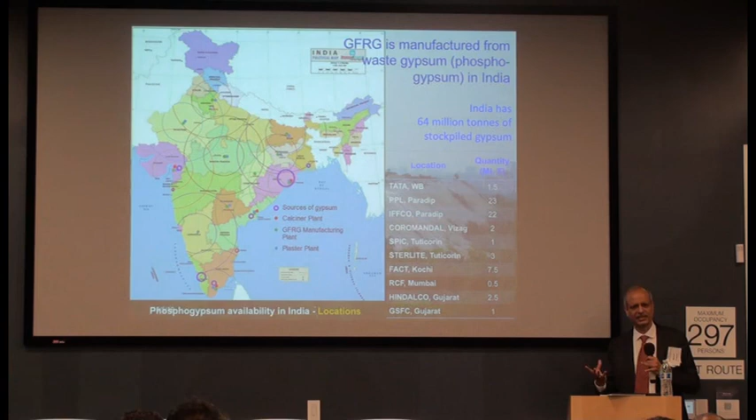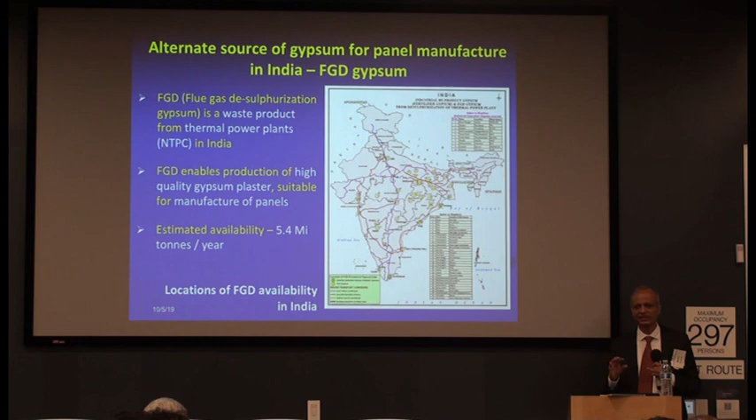We have worked on that aspect as a group. The other source of waste gypsum is coming from thermal power plants, the FGD - flue gas desulfurization process. You get gypsum associated with that one. That's also quite a bit - in fact, NTPC alone is producing around 5.4 million tons.

So with that basis, a lot of buildings have come about. One example I could show - before that, I just want to show the improvements you're going to get in terms of embodied energy, per square meter of panel, compared to conventional construction. This chart basically tells you what is the embodied energy, the energy consumption, and the carbon footprint for this particular technology compared to a conventional one, giving an idea of the possibilities.

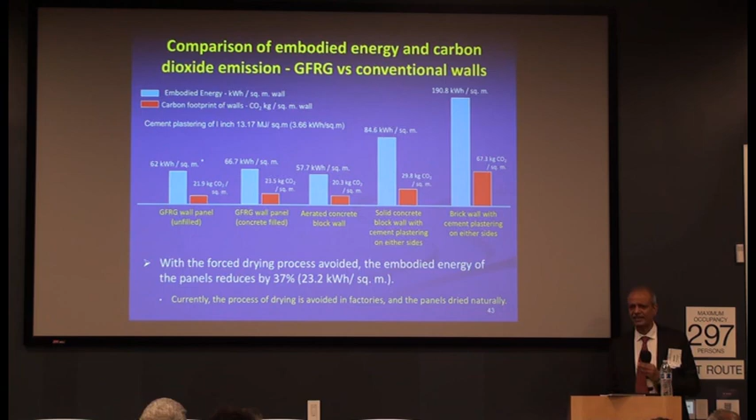Okay, in the construction phase itself, how much is this. There is one building on the IIT campus itself, using DST funding as a demo building, where we also wanted to study thermal performance as well as structural and durability aspects associated with it.

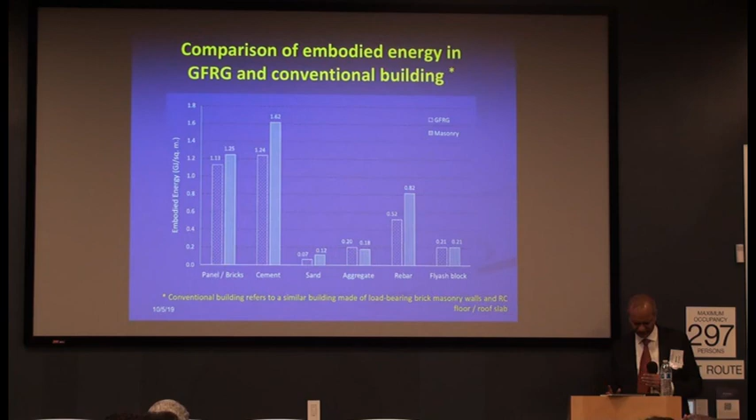What is important here, I'll just skip this one.

This is just a comparison of embodied energy with respect to the thing, and also each component, how much relatively the embodied energy consumption is happening. Supposing you want to look at foundation, you can look at options, which one works better, what type of things you can do.

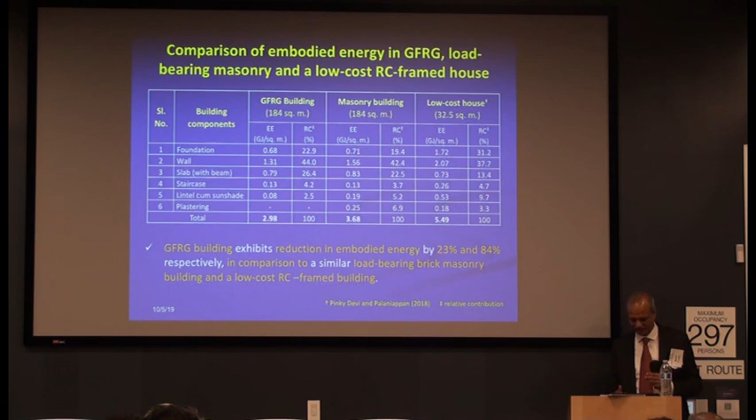So those possibilities we looked at. There are a lot of studies we have done, both at a component level, at system level, comfort level, and we have to develop some things just to ensure that paints stick, primers and waterproofing technologies—we have to qualify those things.

So in the process, when IFC was looking at the things, they looked at it as one very highly possible thing that can be introduced. So they assembled a team. One of the things they identified is you have to have a waterproofing there. So Dow Chemical said they'll do it quickly, but they had to struggle a lot to produce the waterproofing compounds associated. So we helped them do that.

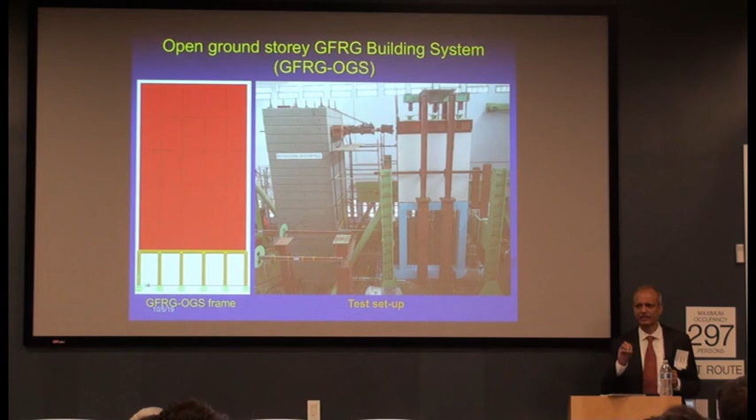We did the test for them. After 6-7 months, they said, okay, now we have an affordable solution for things. Because one way to ensure affordability is you have to have competition in different classes of problems that are there.

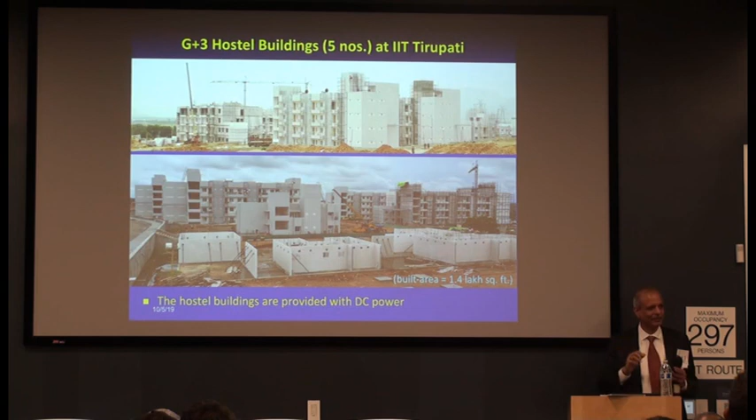What I would like to show here—what you have seen in IIT campus is only a small demo building. In a slightly bigger scale, this is at the 5 hostel buildings in IIT Tirupati, where a lot of ideas were tried: GFRG construction, and also solar energy at the top, DC things, everything put together. So in one single place, we implemented all of those things, and that led to the Green Building Award for IIT Tirupati GFRG buildings, and later Hudco Design Award in the category of green buildings.

So what I would like to point out here is these solutions are possible and achievable, but there are problems. One of the problems is how to create an ecosystem where we produce more and more panels. That's where we are stuck right now. We look at more ideas and investments associated with that.

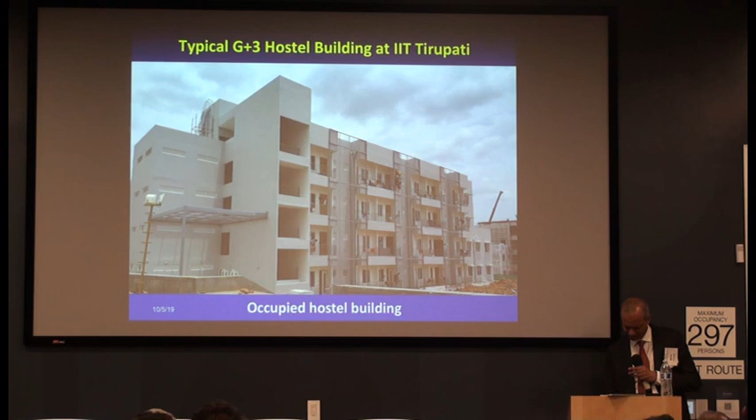What I would like to jump to here—these are other things there, what my other colleagues are doing in associated energy efficient technologies. A colleague of mine who is working with a company is developing coating systems where you can bring down the temperature of the building. This has been reasonably successfully demonstrated at Ahmedabad city, May 21st. The energy consumption is much smaller after you apply these coatings.

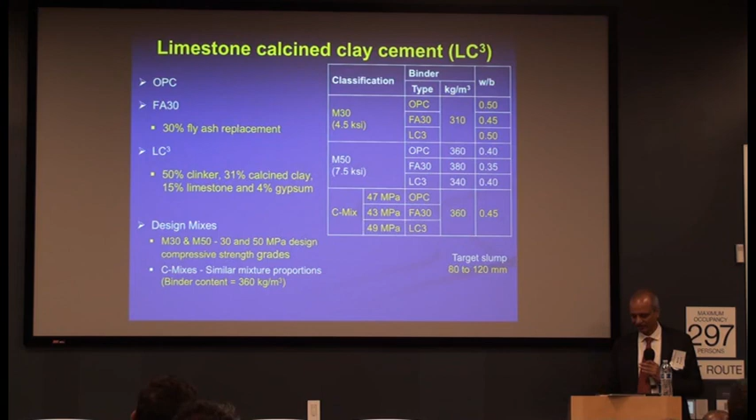Okay, this is one example of this. The other thing where Mr. [name] and his team is also involved is LC3, that is the cement, where you would like to bring down the carbon footprint of the cement. So they worked out some solutions associated with that, the designs, and they also showed around 30% of carbon emission reduction is possible.

This is just to give you a small look at some of the things in the civil engineering group that we are working on in IIT Madras, on the aspects associated with housing, affordable housing. Recently, in the Government of India Housing Ministry, Ministry of Housing and Urban Affairs, they are going to have an incubation cell for IITs. IIT Madras is one of them. In fact, Oscar will be the chairman for that particular thing.

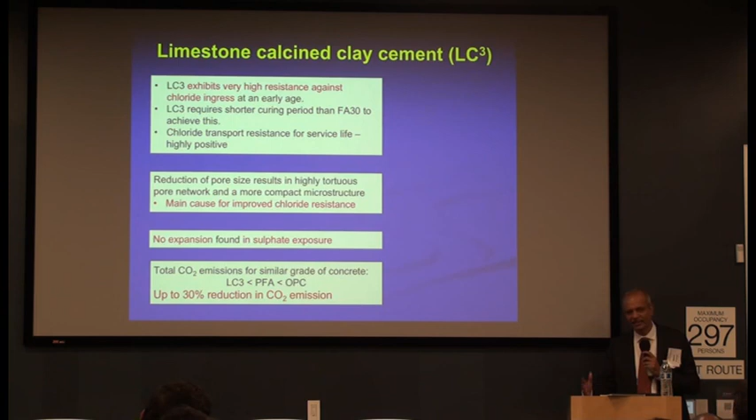That is a group, so we are going to get an incubation cell. It's going to have funding given for an incubation cell, immediately for 2 years. It is 5 crores every year kind of agreement in each of the IITs, across 4 IITs. There are a lot of things that need to be done, and there are some of our own IIT-spawned incubation ideas that probably get funded as part of these things.

So with that, I would like to end my talk. Thanks.